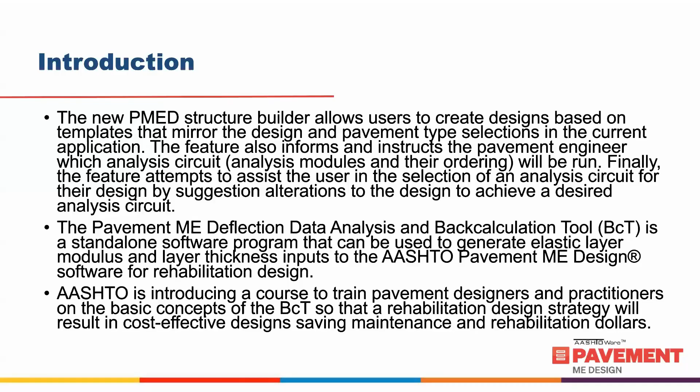AASHTO is introducing a course to train pavement designers and practitioners on the basic concepts of the Backcalculation Tool, so that a rehabilitation design strategy will result in cost-effective designs, saving maintenance and rehabilitation dollars.

Okay, so the structure builder in Pavement ME Design. I'm going to jump out of the PowerPoint presentation here and into the demo. I'm logged into Pavement ME Design already. I've just created a new design here called Test 1, and I'm going to click on the editor.

So right away we can see some differences. The general information page has been changed, the structure page has been changed, and some of the materials properties have been changed. Things are going to remain pretty familiar.

We're going to get into that, but I want to talk about what the key capabilities here are for the structure builder. The goal is to provide more guidance when designers are working inside of the editor, and to help inform designers of the possible design strategy options that are available to them for a given structure, and also to help provide alternatives to that structure by adjusting the materials that are being used.

So it's a new way to edit the design structure. It should be more informative, and it should eliminate ambiguities when selecting a design strategy that we've seen come up through the help desk that people have encountered. Some of the design strategies aren't always clear, and it doesn't express well what the designer wants to be able to do. So the new structure builder is supposed to help with that.

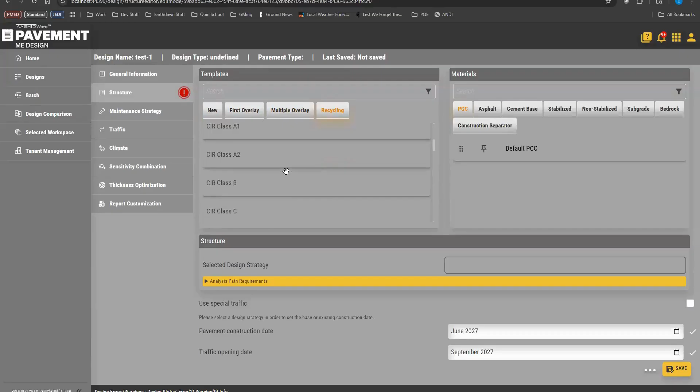This is going to look very familiar from the previous design strategy selection. You've got different types of new pavements, different types of overlays, different types of multiple overlays, and different types of the new recycling templates. The first one we're going to do is just a new flexible pavement. So I'm going to click Apply Template here and then just hit Apply.

And that's gone ahead and just created a new flexible template. So if there's any aspect of the design that I want to change at this point, I can do that by modifying it from the materials box on the right side here.

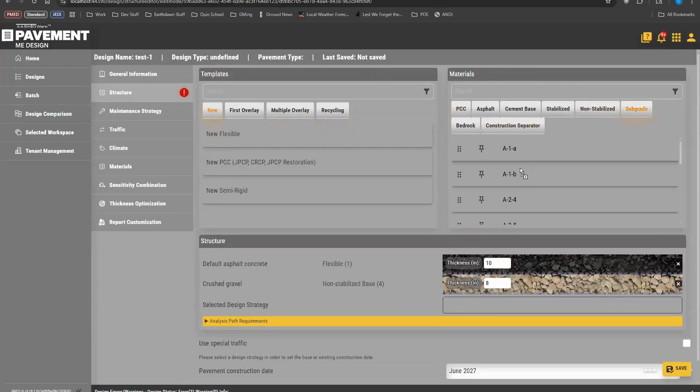So if this isn't the subgrade that I want, I can just get rid of that. Then I can go into subgrade and just pull in a different one, and this is all drag and drop. The templates, you just click the button. Both of these boxes, both the templates and the materials boxes, are still searchable.

So if I was searching for new flexible here, you can see it's going to go ahead and filter the ones that I have available. And just a little tiny feature here, if you uncheck or unselect the tab at the top, now all the templates are showing up in the list, and then you can just do a search against all of them. That way you just have some options when you're filtering the templates there.

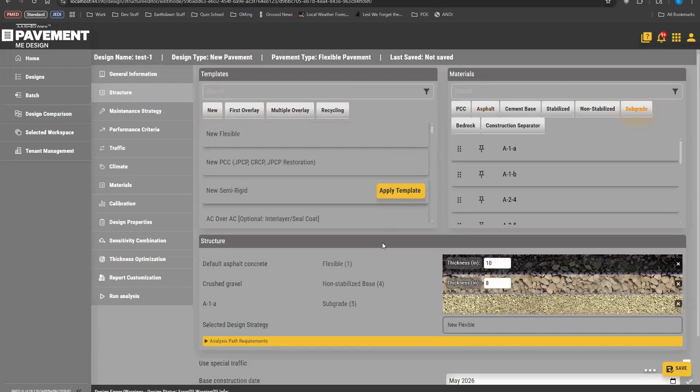Okay, so that has created the new structure for me. And one of the neat things about the new structure builder is that this has gone ahead and selected the design strategy for me. It knows that the system has examined the structure, and it knows that I want to do a new flexible design. Okay, so what about cases that are ambiguous?

So let's go to an overlay and apply that template. Now the program has created an AC overlay, and the selected design strategy is an empty select box.

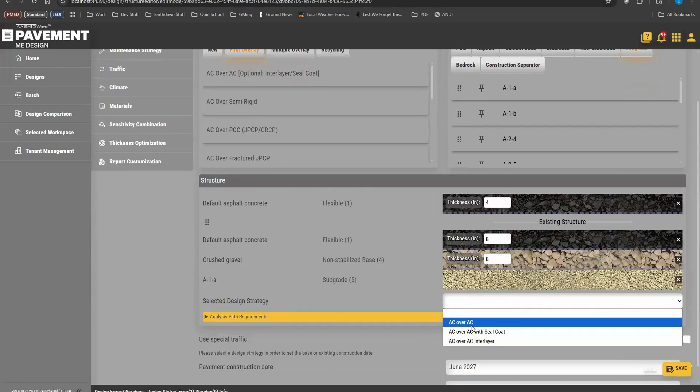So I'm going to click on that, and now I just tell the program, okay, I want to do an AC over AC design, or I want to do an AC seal coat or interlayer, and I select the one that I want. It's going to then populate here in the action menu with the normal stuff that we would expect for materials for an AC design.

So let me go back to structure. I'm going to make one more adjustment here. I'm going to move to recycling, and we're going to do this FDR Class A1. And we can see it knows that this template is a new flexible design, so the user doesn't have to guess at what particular set of recycling templates applied to the new flexible design analysis circuit.

Back on the materials page, we can see that for the flexible FDR class A1 layer, the effective binder content by volume default for that layer has been set. All the other defaults associated with this FDR class A1 material have all been set as well.

That leads me to my next point on this structure builder. We do have some additional features that we're going to add to it in FY26, including the ability for users to create and define their own templates under tenant management as a library. We're also going to include the material libraries in the materials section, so you can load those into your designs as well.

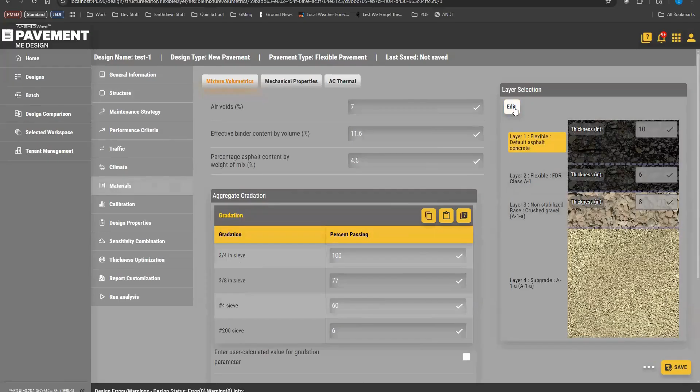One other small change: if you're on the materials page, you'll note that the thicknesses are no longer editable, because these are now part of the structure builder. We've left this edit button here, though. If you click edit, it takes you back to the structure builder, and then you can go ahead and modify your thicknesses for each layer.

One of the last things I want to show you is this new analysis path requirements drop down. This table is meant to provide guidance to users if there's a different type of pavement they want to build but they're not able to, and they don't understand why the particular structure isn't allowing it.

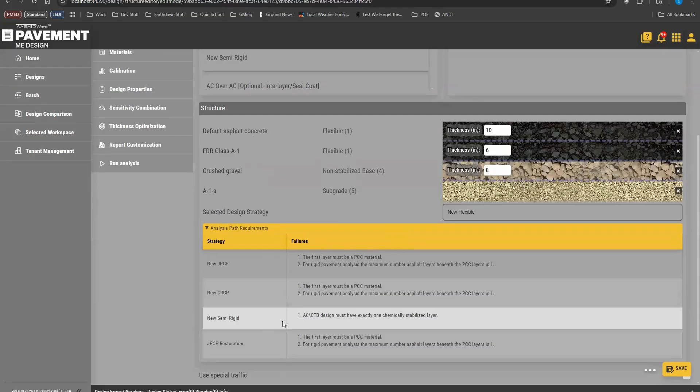One of those we've bumped into quite a bit is new semi-rigid. In order to build that, it's letting me know, well, in order to build new semi-rigid, I need an AC over CTB design. I need a chemically stabilized layer.

So I can come up here to my cement base, grab the cement stabilized layer, and chuck it in there. Now the program has analyzed the structure and identified this as a new semi-rigid design, and it will follow the appropriate analysis path.

So it's no longer required to be selected by the users. The program's going to look at the structure, figure out what design strategy you're going for, and provide either the only possibility based on the structure, or a set of possibilities, and then the user can pick the one they want.

This table allows you to, if you had questions about a different type of design strategy you wanted to build, and whether or not it represents a legal or allowable analysis path in the application, guide you in that direction.

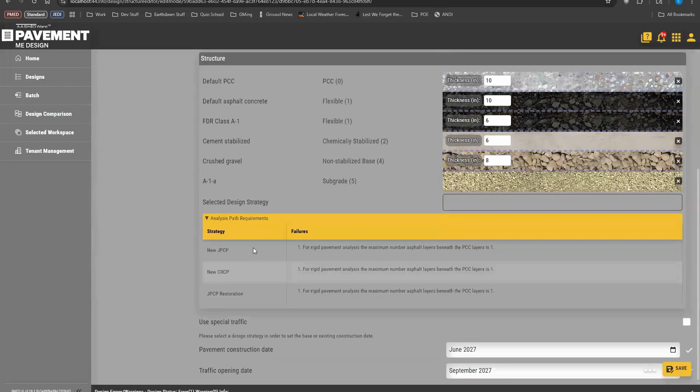So if I wanted to do a new JPCP, I could do that here by just dragging this down. Now it says for rigid pavements analysis, the maximum number of asphalt layers beneath the PCC layers is 1. Okay, great, so that means I just come up here and delete this layer.

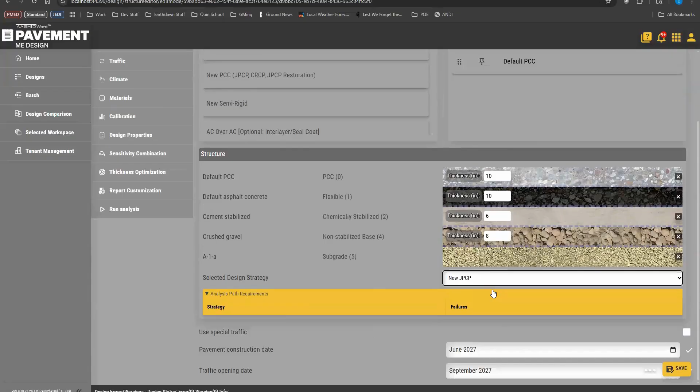Now I have available to me new JPCP, new CRCP, or JPCP restoration, and I can select the actual design information that I want at this point. I know I'm going to build a JPCP pavement, so I select that one. Then again, it loads in the appropriate materials pages for the desired structure.

The only other difference here is some of the general information stuff related to the structure was moved to this page, so things like the pavement construction date and the traffic opening date.

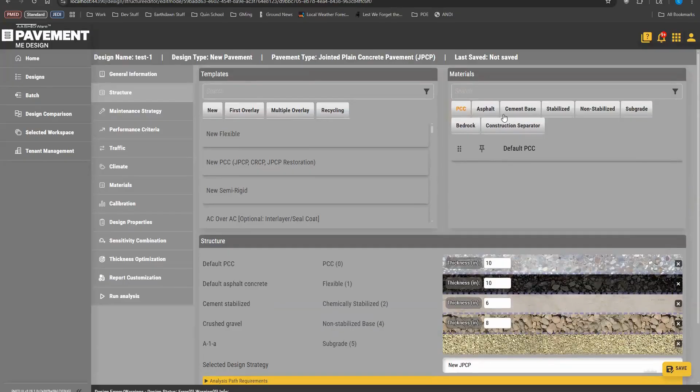If you're working with an overlay, there is a construction separator for that, which gets automatically added in. I think we saw that earlier. I'll just apply an AC over AC overlay, and you can see that has shown up here.

When I select AC over AC, you can see we get our existing pavement construction date and our proposed overlay date as expected. The same is true for things like multiple asphalt overlays - throw one of those in, and now we have our original pavement construction date as well as the other construction dates available. This works identically to the way it worked in previous versions of the application.

So this feature is currently under review. We have some additional meetings with the technical review team to finalize some of the user interface and workflow elements, and the task force has also performed a review of it. We anticipate that if it's accepted by the TRT and the task force, sometime after the user group meeting we'll make this feature available as the new way to select design strategies in the system. But we want feedback from this webinar and the user group meeting before we make that decision, because this is somewhat of a large change in the workflow, and we want people to feel comfortable with it.

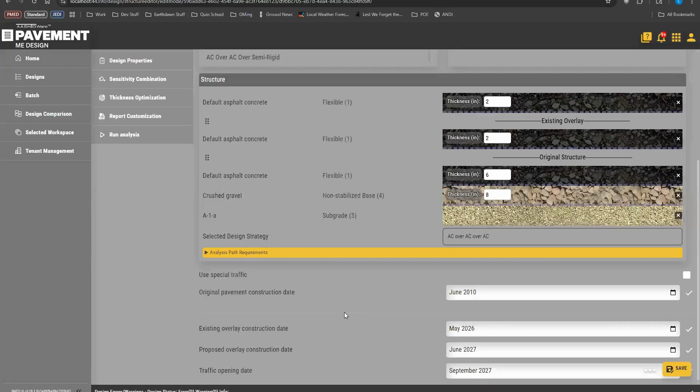And with that, I think I can hand it back over to Abu. So thank you, Jad, for the wonderful presentation on the structural builder. I'm sure this feature, the template design, will be really helpful for many of us doing design in the PMED. Now let's move our focus to the back calculation tool, which is a standalone software, as I mentioned, that can be used to generate elastic layer modulus and layer thickness inputs to the AASHTOWare Pavement ME design, PMED, for pavement rehabilitation design.

In this part of the webinar, I will show the functions of this BCT tool through some screen captures that were taken during running an actual back calculation using the BCT.

Here are the discussion topics. First, I'll show how to access or install the back calculation tool. Then I'll go through how to access the BCT user or help manual. I'll use the BCT user or help manual interchangeably from now, as these two are basically the same document. The BCT app is also integrated with the web app version of PMED. And then I will show the main user interface and modules of BCT through some screenshots. And finally, I'll demonstrate step-by-step use of BCT in back calculation through PMED.

Okay, now let's see how to access or download the BCT. To access the BCT software, you will need a PMED license. The BCT is included with your AASHTOWare PMED license subscription. So if you have a license to PMED, you automatically have a license to the BCT tool. You can also purchase the BCT as a standalone single user license with an annual fee of $1,650. The link for accessing the BCT is provided in this slide.

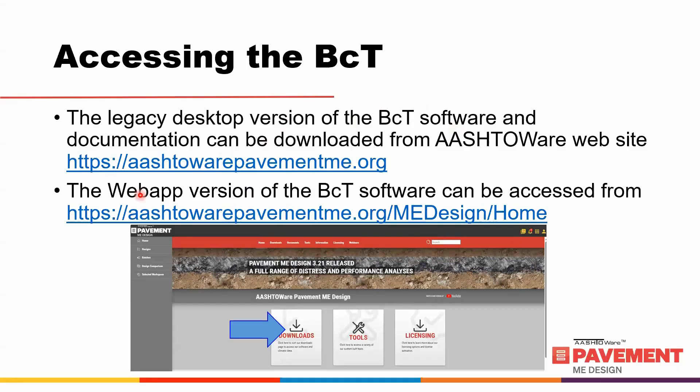So where is my laser pointer? If you go to this website, AASHTOWarePavementME.org, you'll see there's an option of downloading the legacy desktop version and the documentation associated with it. But as Chad said, we also have a web app version that's integrated with PMED. If you log into AASHTOWarePavementME.org with your credentials, you'll see the BCT. Like I said, if you go to the AASHTOWare website and log in with your user information, the BCT icon will show under the apps, on the top right corner of the screen. From now on in this webinar, I will only use and refer to the web version of the BCT, as this is the version that will be updated moving forward.

The 4 chapters are: Introduction, which is a brief intro and background behind developing the BCT. The next chapter is Getting Started, covering input of your falling weight deflectometer, or FWD, data, and describing the deflection and layer thickness data. Chapter 3 is Pre-Processing and Structure Definition Module, which describes the individual pre-processing modules in detail, along with the required user inputs, module controls, and information displays. And finally, Chapter 4 describes the back calculation and post-processing modules.

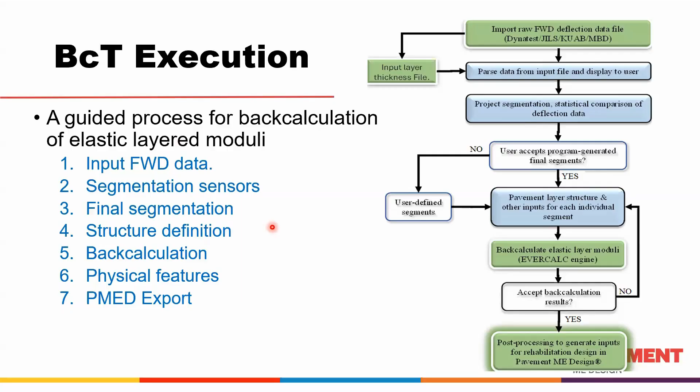The flowchart displayed on this slide is a guided process for back calculating elastic layer moduli for use in rehabilitation design. The guided process is a 7-step process, and these 7 steps are also 7 modules in the BCT tool. In this part of the webinar, our discussion and demonstration of BCT will be based on this 7-step process and the flowchart you're seeing here.

The modules are executed sequentially, with some requiring user inputs or selections, while others just display information such as charts or results from internally performed calculation. Users can return to any of the previously completed modules to make changes, but can only proceed to the next incomplete module.

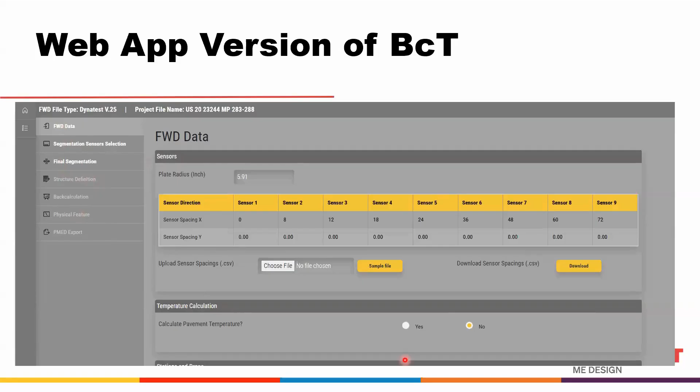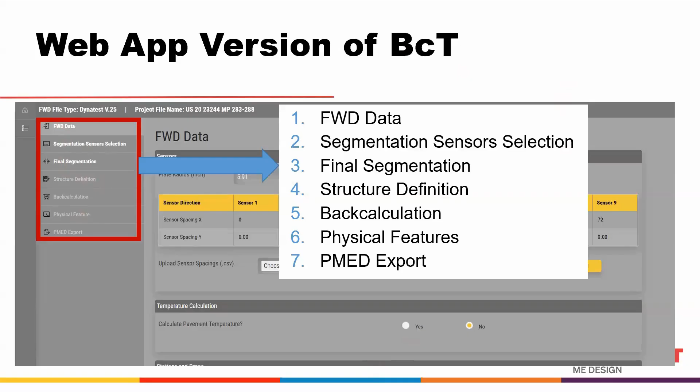This slide shows the main user interface of the BCT. Just to reiterate the 7 main modules of BCT.

Now let's go to the first module of the BCT, that's FWD data. I'll very briefly describe the primary function of this one.

After accessing the BCT software, a user or designer will need to create a new project with the BCT and upload the FWD deflection files and layer thicknesses. After opening the program or the app from the PMED website, the first screen you will see is shown in this slide. So to start with, you have to click on the new project button. The software will automatically go to the next screen, which is this one.

Now, a designer can create a project file using two different methods. The first one is creating a new project. This approach involves initiating the project from scratch, or if you're doing it for the first time. Initially, the falling weight deflectometer file type is identified, followed by uploading the FWD deflection data. Optionally, a layer thickness file can also be uploaded. However, it is not mandatory for executing or running the BCT.

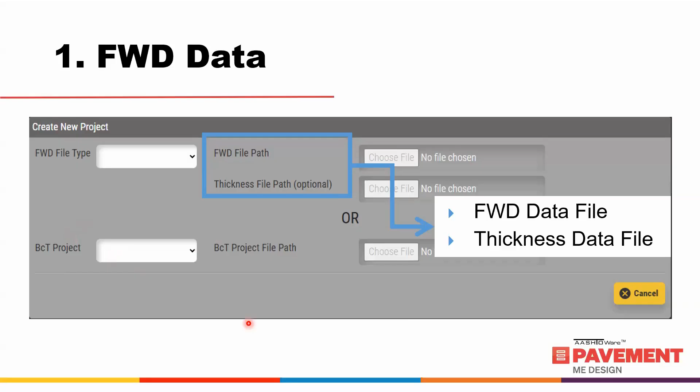And the second option to create a project is if you have an existing BCT project. This method is used when a project has already been created and processed. The existing BCT project can be revisited if you need any revisions or updates to the associated data files and processing parameters. This procedure requires specifying the BCT project name and the associated project file path.

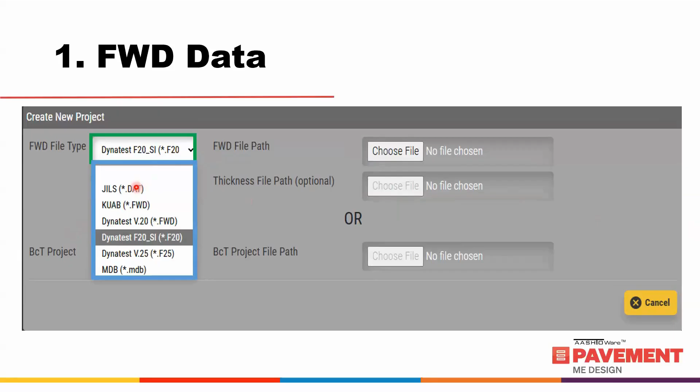And then the first essential step in setting up a project in the BCT is identifying the falling weight deflectometer basin data. The BCT currently recognizes 6 types of standard FWD file formats, each corresponding to widely used FWD testing equipment and data structures.

These standard formats are: first one is the JILS, typically associated with data generated from JILS deflection equipment. This uses the .dat file extension, as you can see. Next one is the KUAB, associated with data captured by KUAB brand deflectometers, recognizable by the distinct .fwd file extension. Numbers 3, 4, 5 are the Dynatest, version V20, which correspond to their version 20 software output.

F20 is their SI format output from Dynatest. It is widely recognizable for standardized international reporting. Finally, the V25 is associated with Dynatest version 25 software, providing advanced data handling and improved output options. The sixth format is the Microsoft Database .mdb format, offering compatibility with various database management systems.

Further details and comprehensive guidance on preparing, formatting, and uploading both deflection and layer thickness files can be found in Chapter 2 of the BCT user or help manual that I mentioned a couple of slides ago. Users are strongly encouraged to consult this resource to ensure accuracy and efficiency in project setup and execution.

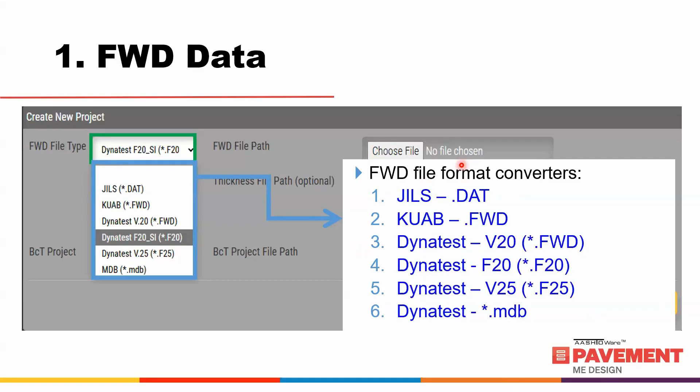After identifying the location of the FWD deflection data and layer thickness file paths, the user will need to click on Create Project. This will be something at the bottom and not in the screenshot. After clicking the Create Project button, the next screenshot is displayed in the next slide here.

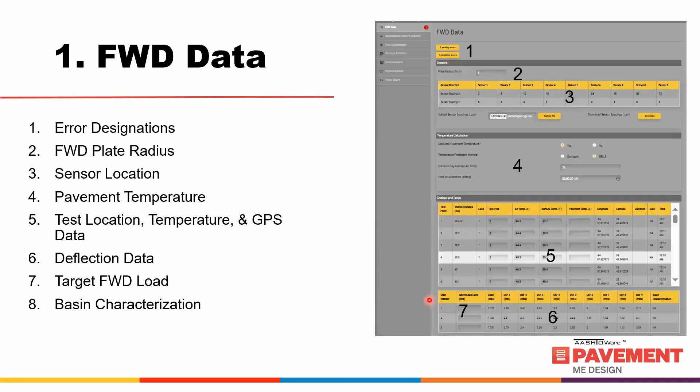Number 4 is pavement temperature calculation, if you are trying to do temperature correction to your data. Number 5 is the test location, temperature, and GPS data. Number 6 is the deflection data. Number 7 is the target FWD load that the user needs to input, whether it's 9 kips or 11 kips. And number 8 is the basin characterization.

Just to reiterate, most of the data will be populated in the BCT from the FWD deflection file that you're uploading.

As mentioned in the previous slide, sensor location data can often be embedded directly within the falling weight deflectometer deflection data file. In such a case, the Backcalculation Tool, or BCT, automatically extracts and populates this information into the system. However, if sensor locations are not included within the original FWD deflection dataset, they must be provided separately.

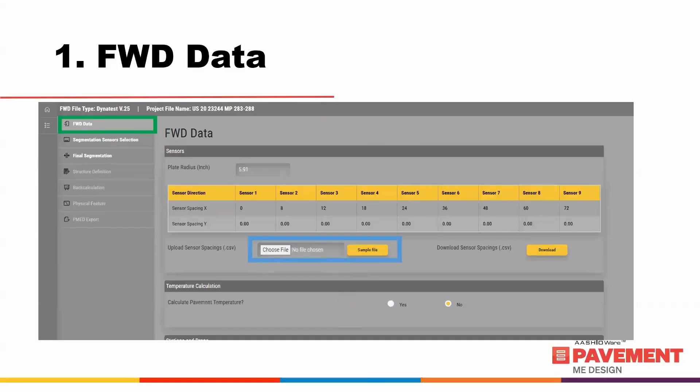As you can see here, users have the option to either manually input the sensor location or sensor spacing directly into the BCT interface, or to upload them through an external file. If manually inputted, the sensor coordinates can subsequently be saved to an external file format for later use. This approach allows users to conveniently reuse the same sensor location data in future backcalculation projects utilizing the same FWD file format.

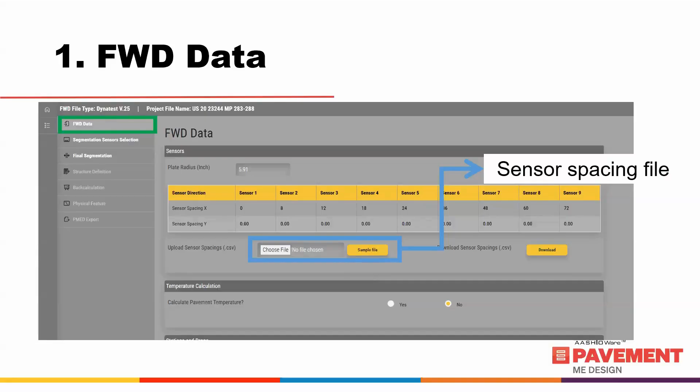Let's go to the next slide.

The intent is to capture as much information on the response of the pavement and subgrade as possible, to understand how to break the project into different design segments.

In summary, the sensor under the loading plate and the sensor further from the loading plate should be 2 of the 3 sensors used for segmentation in most design cases.

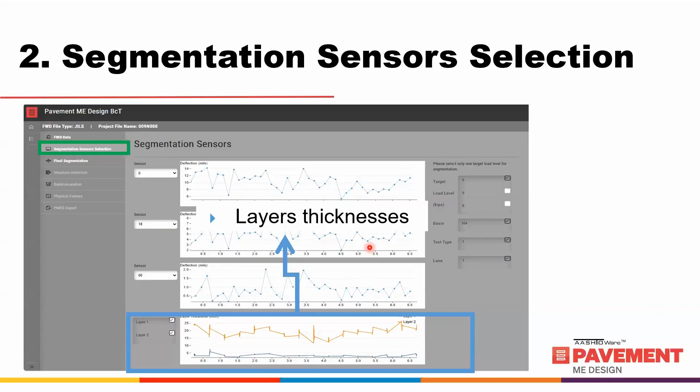One more thing to mention: in the segmentation sensor screen, this will show different layer thicknesses with chainage, but that will not affect your segmentation process. It's just for information purposes only.

These items include preliminary segmentation, statistical segmentation, and the layer material assignment for each segment. As mentioned, there are 2 segmentation procedures to identify areas on the project that respond differently to loads.

The preliminary and statistical segmentation procedures are also discussed in Appendix B of the BCT user or help manual. When the user clicks the first button, the preliminary button, the locations where the response changes appear.

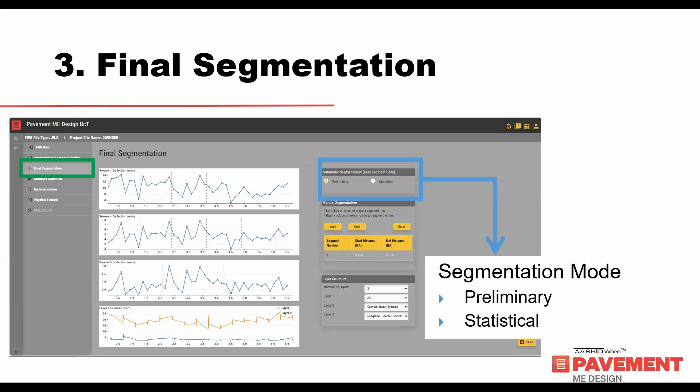Some more details on final segmentation: at the bottom of the screen is a layer structure table. This table only appears when a layer thickness file is imported into the program in step 1, or module 1, of the guided process.

The user must manually assign a material type to each layer within the layer thickness file. For this example, 3 layers were identified within the GPR data: an asphalt or AC layer, a granular base, and a coarse-grained soil subgrade.

A maximum of 5 layers can be used in the structure simulation in the BCT. The different material types are included in the drop-down screen, and the user assigns a material type to each layer.

The default layer properties for each layer type are in accordance with the MEPDG Manual of Practice. These assignments are also included in Appendix C of the BCT user or help manual.

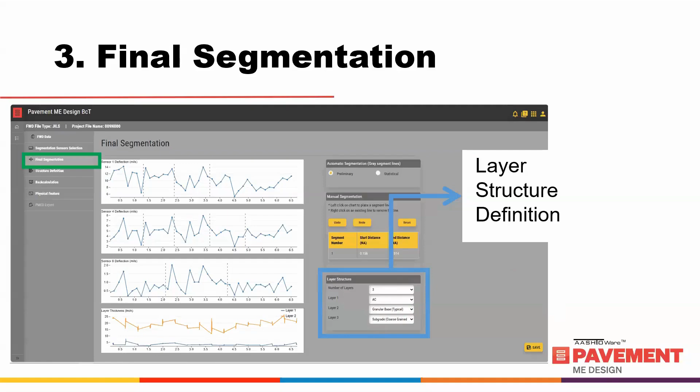The purpose of structure definition is to create the pavement structure for each segment, or to review the structure created from the layer thickness file imported in step 1.

The items are the number of layer types, layer thickness in inches, Poisson's ratio, maximum and minimum modulus that the user can input, and a seed modulus.

Some things to remember for structure definition: the layer thickness and other properties are imported from the other available data inputs from step 1, or module 1.

Also, a designer needs to reduce the minimum elastic layer modulus to a very low value and increase the maximum layer modulus to a very high value, so that the limits of the layer modulus are not exceeded during the back calculation process.

If the layer thickness file is not imported, all information on this screen needs to be manually entered for each segment. But if you have a thickness file, that thickness will be automatically populated.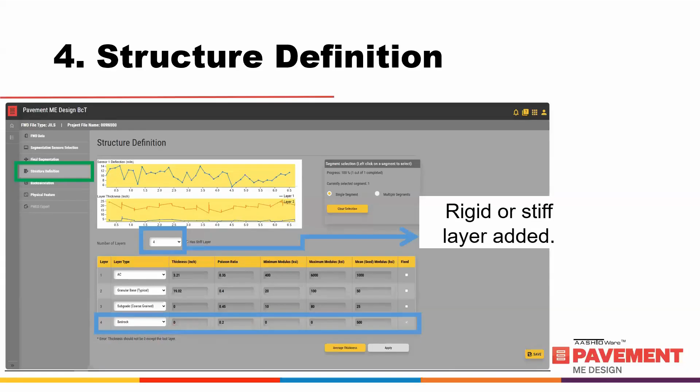So just to reiterate, if you want to add a rigid or stiff layer, you have to check the box that has a stiff layer.

The user also needs to check the layer thickness and other properties for each of the segments. Then when you're happy with your layer thickness and other inputs, you need to click on the apply button to accept the values included for each segment. For this example in the screenshot here, you can see this specific pavement segment is divided into 3 segments. For these 3 segments, you need to hit apply and proceed to the next step, which is step 5 in the guided process, because the layer structure simulation for all segments have been accepted.

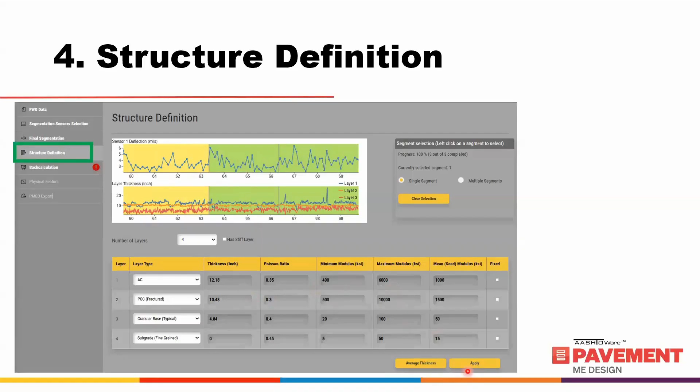And just to reiterate the function of this step, the user needs to check layer thickness and other properties for each of the segments. Now let's move on—as I said, modules 1 to 4 were the pre-processing of the layer inputs, and module 5 is the back calculation process. So now let's move to that module.

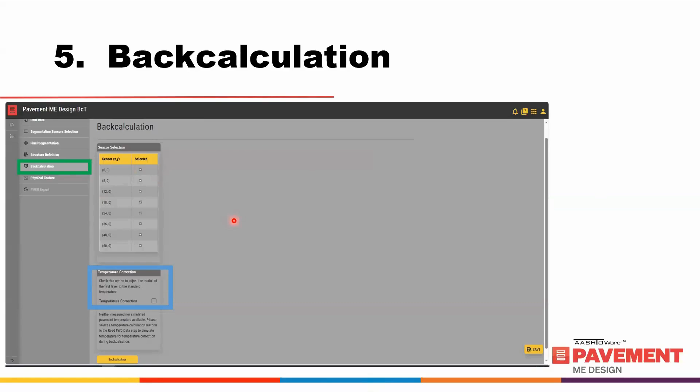The user or designer needs to make 2 decisions on this screen or tab. The first is related to the sensors, as you can see here, to be used for back calculation. The second is to determine whether the asphalt layer elastic modulus is going to be adjusted to a standard reference temperature. First, the deflection recorded by the sensors is checked on the screen.

Any sensor that should not be used or should be excluded from the back calculation process needs to be unchecked from the list here. Unchecking the box for a sensor means the deflection for that sensor is not going to be used for the back calculation process. Sensors that should not be used for back calculation are those with a negative x-axis value for the load transfer efficiency, LTE—we'll discuss later how to get LTE from BCT.

The second decision is to manually enter the reference temperature when all asphalt layer moduli need to be adjusted to the reference temperature. Simply check the box you see here and enter the reference temperature you need. If temperatures are not included in the deflection file, it is suggested that this feature doesn't need to be used.

After these two decisions are made, the user simply clicks the back calculate button here, and the BCT starts the back calculation process for all pavement layers and segments. Just to reiterate, the function of temperature correction: if pavement temperatures are not included in the deflection file, you do not need to use this adjustment.

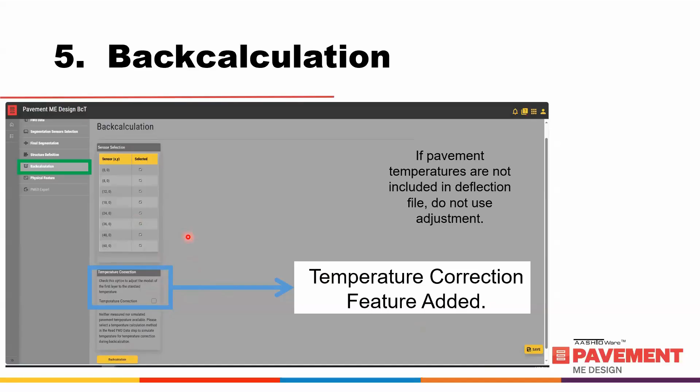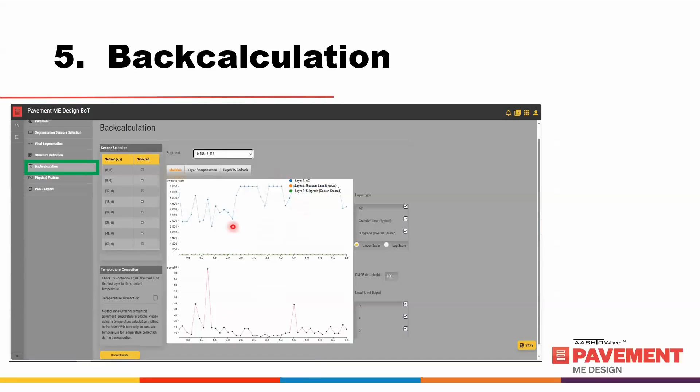So this is the screen right after the back calculation is finished. You can see two graphs. The plot above shows the back calculated elastic layer modulus for the AC layer, the base, and the subgrade. If we zoom in, you can see the outcome from the back calculation of all the layer elastic moduli. Let's overview the information included on this screen.

First, the results or outcomes are summarized for each segment. You can see this is the first segment. The user simply clicks on the drop-down arrow here when there is more than one back calculation segment defined during the final segmentation step. The outcomes for each segment are included in the tabs identified on the screenshot. As you can see, there are 3 tabs, which include modulus, layer compensation, and depth to bedrock. When the outcomes are summarized, the modulus information will always be shown first.

The modulus result includes 2 graphs that represent values for each specific segment. The first is the graph of the back calculated elastic layer modulus for each layer in the structure simulation along the segment. This graph appears as an arithmetic plot, but you can change it to a log scale or a semi-log plot, which is shown on this screenshot here.

The pavement structure used in the simulation or example included an asphalt wearing surface, a granular base, a subgrade layer, and a bedrock. You can select different layer types and see the back calculated modulus for each of the layer types. The user also has the capability to turn off the results for any layer. One reason for doing this is when the layer is designated as a fixed layer, and the elastic layer moduli are not calculated from the deflection basin. As an example, if you have a bedrock or a very thin layer.

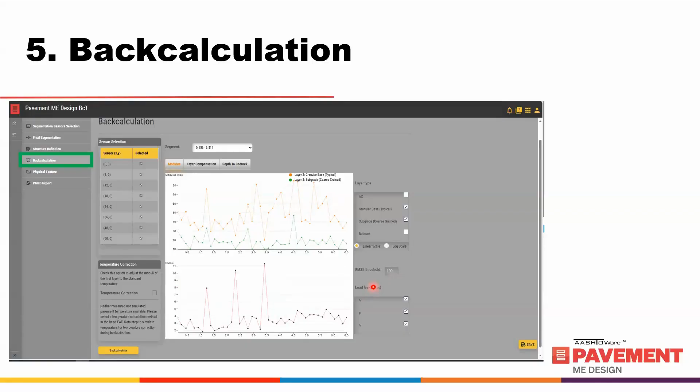If many of the locations have higher RMSE values, say exceeding 10 or 15%, that usually implies the pavement structure needs to be revisited, or the layer thicknesses could be different, or possibly the back calculated elastic layer moduli exceeded the minimum or maximum elastic layer modulus set by the user in the structure definition step.

Now let's discuss the post-processing step. I'll start with the physical feature tab of the BCT. This is a screenshot of the physical feature tab after the back calculation is performed. Two parameters will be addressed here. The first plot shows the load transfer efficiency, or LTE, of transverse cracks and joints, and the bottom plot is the loss of support, or potential voids or material disintegration of the bound layers.

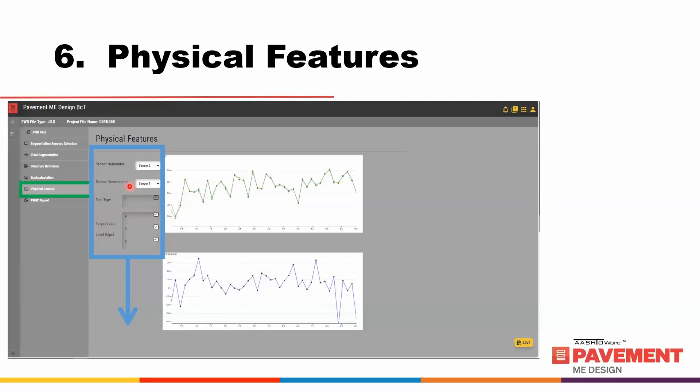The user first selects the sensor to be used in calculating the load transfer efficiency across the transverse joint of PCC pavements or transverse cracks in flexible pavement. Using the Long-Term Pavement Performance (LTPP) definition of load transfer efficiency, the deflection measured at sensor 9 is divided by the deflection measured at sensor 1. Sensor 1 is on the loading plate, and that gives you the LTE, or load transfer efficiency, of rigid pavement joints.

For flexible pavement, the deflection measured by the trailing sensor, or sensor 9, is divided by the deflection measured by sensor 2, which is 8 inches away from the center of the loading plate. The BCT program can use all drop heights or target loads for load transfer efficiency calculation, but the user can select just one or all of the target loads.

Now let's discuss the bottom picture, the loss of support or void detection. Chapter 4 of the BCT user or help manual includes a detailed discussion of the loss of support variable. In summary, the loss of support variable is the intercept between the deflection versus load level relationship. Positive values of a certain magnitude will suggest you have potential voids underneath the PCC layer.

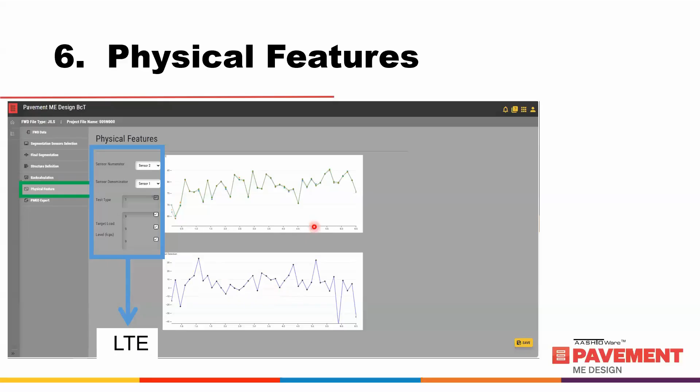However, this variable can be used to visually determine how the loss of support variable changes along the segment. Positive and negative values can suggest anomalies or disintegration of mixtures or materials beneath the wearing surface. And finally, the final tab of the BCT is the PMED export.

Now that the results have been reviewed and accepted by the user or designer, let's focus on exporting the BCT data for use by the user and creating a PMED file for rehabilitation design. At the bottom of the summary of results screen, you can see there are 3 feature boxes or actions. The first one is the export to ME Design.

You can export this result directly to a ME Design file, which will save you some time in the pavement rehabilitation design. You also have the option to export this as BCT data, so you can use it later to modify your structure or modify your seed moduli or anything else.

The third option is the normalized deflection data. Some agencies have a requirement to normalize the deflection data to a certain load level, like 9,000 or 11,000 pounds. You can also do it from the results here.

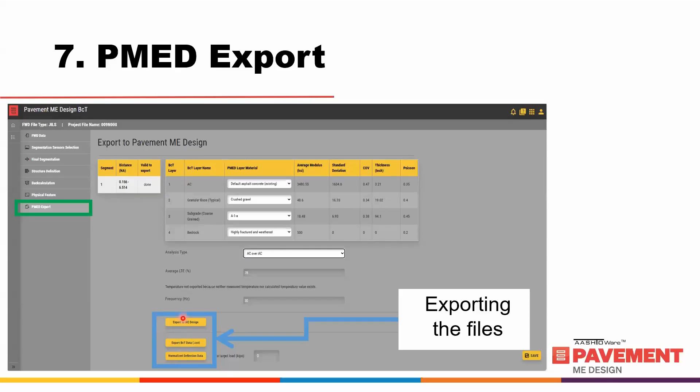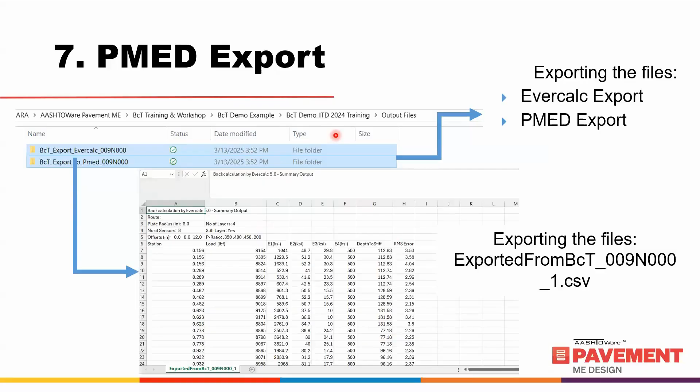After the user clicks export BCT data, a zipped file will be downloaded and created as shown in this slide. Excel files are included in the zipped file for each segment. If a user defined one segment, then one Excel file is created. But if a user defined 5 segments, then you will get 5 Excel files separately, inside the zipped file.

Until now, the part of the webinar we just finished was a very high level, I would say a bird's eye view of the function of the BCT. So if you want to know more details about the usage and process of BCT, and deep dive into more of its background, inputs and outputs, we are preparing a web-based training course that will be hosted by AASHTOWare. I will try to give you a very brief outline of these upcoming training videos.

Discussion topics of this part of the webinar will be: I'll introduce the web-based course on the BCT, state what will be the outcomes and objectives a user can get after finishing this training course, who will be the target audience of these training videos, how we organize the course and what will be the delivery format, and finally the course roadmap.

Introduction to the training course. The title of the training course would be Principle and Application of the BCT, which is Backcalculation Tool for Rehabilitation Design using the PMED software. Course overview.

The goal of this course will be to train pavement designers, practitioners, and engineers on the basic concept of the BCT so that a rehabilitation design strategy will result in cost-effective design that will save maintenance and rehabilitation dollars of the agencies. The course focus is on the procedures described in AASHTO's Mechanistic Empirical Pavement Design Guide, MEPDG, 3rd edition, Manual of Practice that's specific to rehabilitation design input level 1.

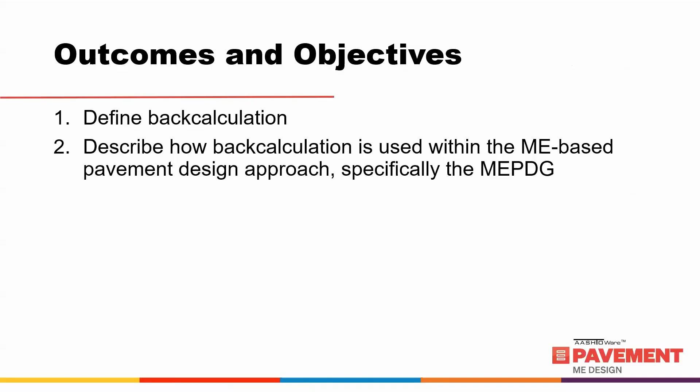Outcomes and objectives one can get attending this course: the user can define the backcalculation process, describe how backcalculation is used within ME-based pavement design approaches, specifically in the MEPDG, define the fundamentals of deflection testing, explain the BCT backcalculation procedure and its different limitations, list different types of pavement layers and how to simulate them in the BCT app, and define different input levels, like input level 1, 2, or 3 in the MEPDG.

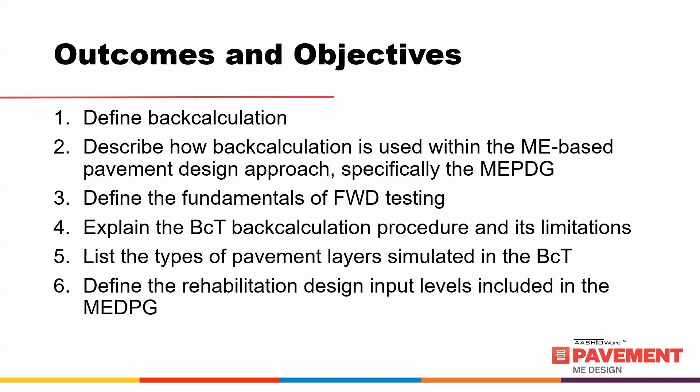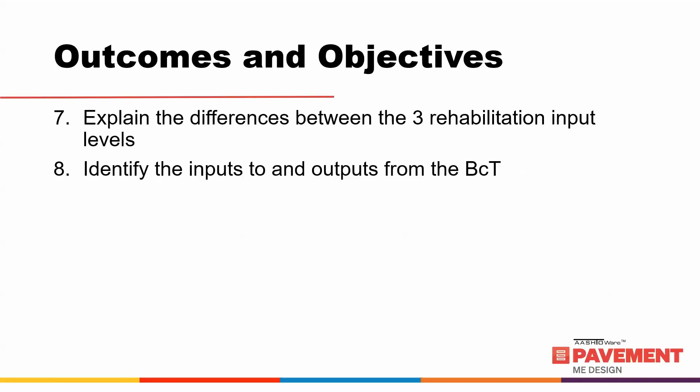Some more outcomes and objectives. After finishing the course, the user or designer can explain the difference between the 3 rehab input levels 1, 2, and 3 for PMED, identify the inputs and outputs of BCT that I showed very briefly in the last half hour, and finally describe how to revise BCT inputs to achieve more accurate outcomes.

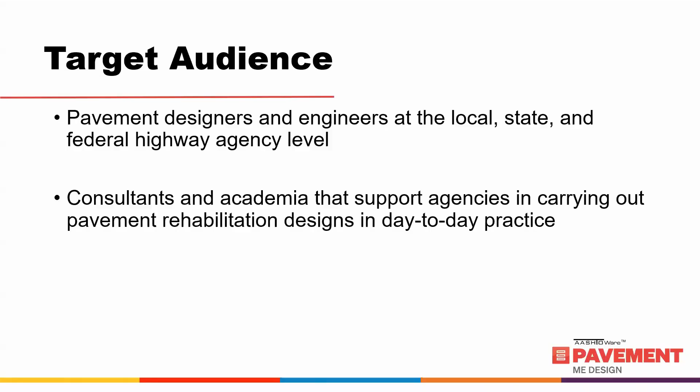Target audience of this course: pavement designers and engineers at the local, state, and federal highway agency level, as well as consultants and academia that support agencies in carrying out pavement rehabilitation designs in day-to-day practice.

Course organization and delivery format. This course was designed and organized in a modular structure, so there will be specific modules and sessions I'll show in the next slide. The specific modules can be delivered individually or they can be delivered together. However, the course can be easily revised to fit an agency's needs.

From less to more experienced staff on deflection testing and backcalculation of elastic layer moduli, the modular structure will also provide an agency the flexibility to host and deliver the entire course at one time, or some selected modules for a specific audience.

The course materials were developed for delivery in a webinar format so that participants can view at their own pace. The course material, however, can also be used for delivery in a standard in-person environment, instructor-led type training environment.

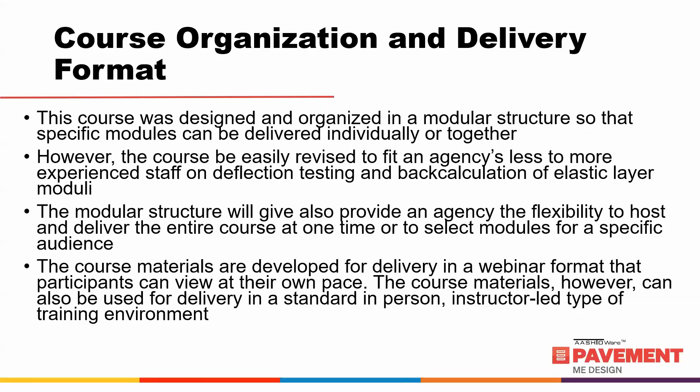Module 2 will be the details of fundamentals of falling weight deflectometer testing and back calculation. Session 1 will be completely on FWD deflection testing. Session 2 will discuss the details of structure simulation, like how a designer can simulate a pavement structure within BCT and how to determine thickness of different layers. Session 3 will discuss the back calculation procedure process itself.

Module 3 will be a whole recap of the input level 1 of pavement rehabilitation design using PMED. Module 4 will be solely focused on back calculation and the BCT.

Session 1 will be how to access the BCT software, the web app, and the desktop version if you want to use. Session 2 would be a BCT overview and inputs. Session 3 will discuss different BCT outputs and how to interpret the results. And session 4 would be BCT results for rehabilitation design.

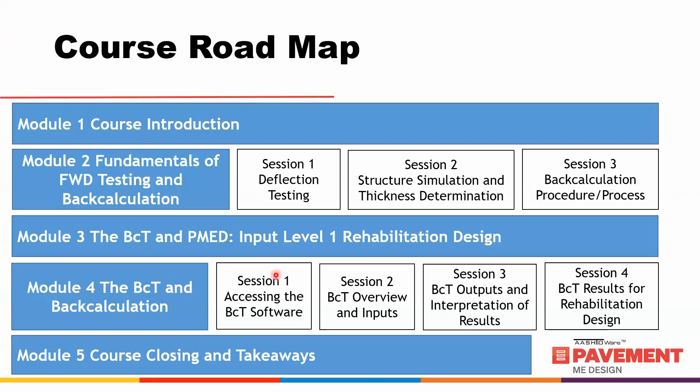And then the course will finish with closing and takeaways. With that, I am in the concluding part of my portion of the webinar. Just to reiterate the summary and takeaways the participants can take from this webinar.

First one is what Chad described, the PMED structure builder. This template-based design procedure will allow the user to create designs based on templates and assist the designer in selecting an analysis circuit for the design by suggesting alterations, so that the desired analysis circuit can be achieved. So in short, you will have different templates that you can select from a catalog.

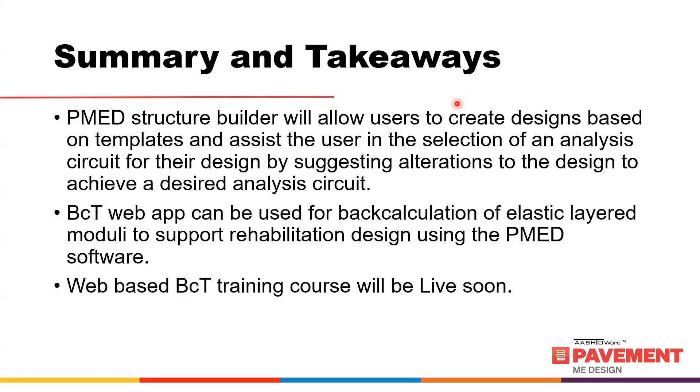And then we showed a very brief demo of the function of the BCT web app that can be used for back calculation of elastic layer moduli to support rehabilitation design using the PMED software. And finally, I described the web-based training course that will be live soon, hopefully next fall.

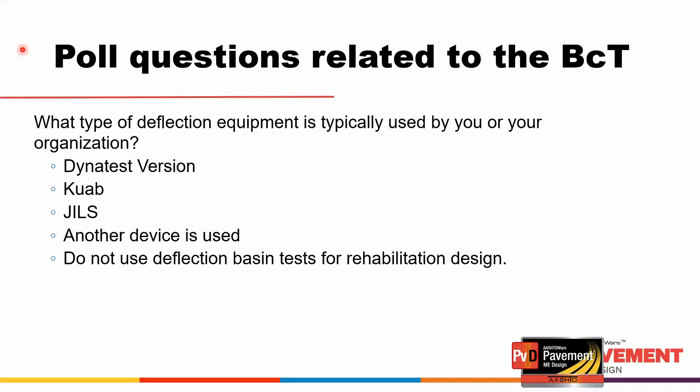So the first question to the user is, what type of deflection equipment is typically used by you or your organization? Dynatest, Kuab, JILS, or any other device, or if you do not use deflection basin test, you select option 5. The second question on your screen is, which backcalculation program do you or your agency use for rehabilitation design?

You can check all that apply: if you use EverCalc, ELMOD, Modulus, ModComp, or MODTAG, or MICBACK, or another backcalculation program. I think we'll wait a couple minutes.